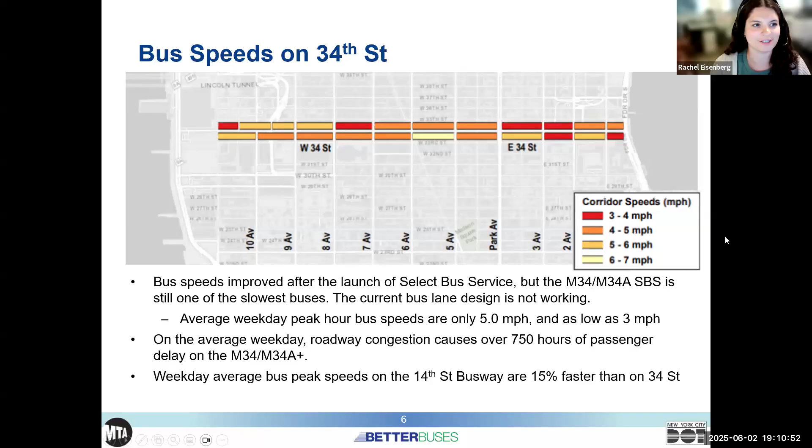Now just to go over a summary of our work to date: curbside bus lanes were first added to 34th Street in 2008. As Joe mentioned, select bus service launched in 2011 with the M34 and M34A SBS routes. As part of that work, we upgraded many of the existing curbside bus lanes to offset lanes seen today and added 11 bus bulbs, with one still underway at 8th Avenue.

More recently this fall, we conducted pedestrian intercept surveys and merchant surveys along 34th Street between 2nd Avenue and 9th Avenue. Over 200 pedestrians were surveyed, and DOT visited 112 businesses along the corridor. Earlier this winter, we presented existing conditions to community boards 4, 5, and 6, and in this meeting we will be presenting a draft proposal.

So just going over a little bit of what we've heard from all of that work. From our on-street engagement, we heard about overcrowding on sidewalks, long crossing distances, concerns about congestion. Bus riders noted slow bus speeds and long wait times, and businesses noted an overall need for additional loading space on and around the corridor.

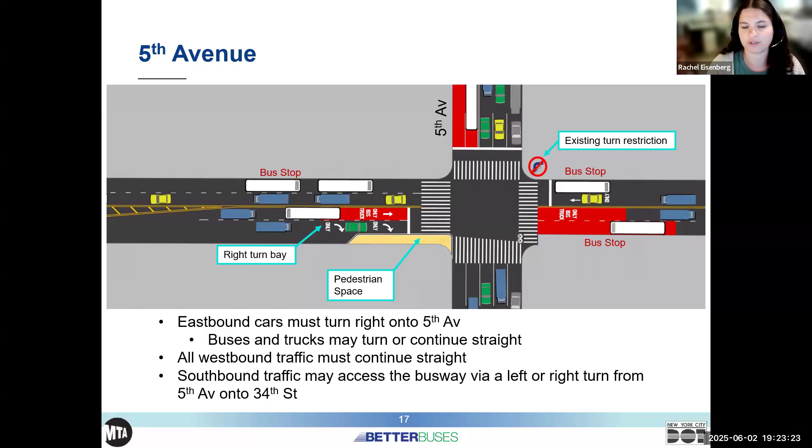At 7th Avenue, similarly, because of existing turn restrictions, vehicles will continue straight. We are proposing some expanded pedestrian space in the southeast corner of the intersection.

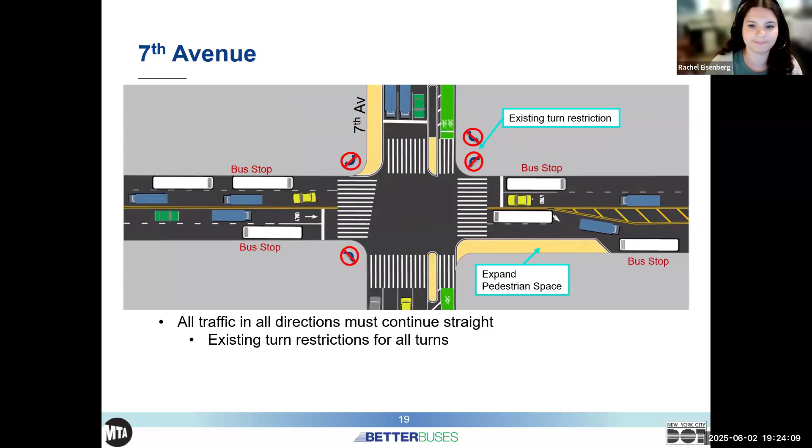At 8th Avenue, we're proposing a right turn bay in the westbound direction. Only buses and trucks can continue straight in the westbound direction. In the eastbound direction, because of the existing turn restriction, the existing left turn ban, all vehicles will continue straight through the intersection as they currently do.

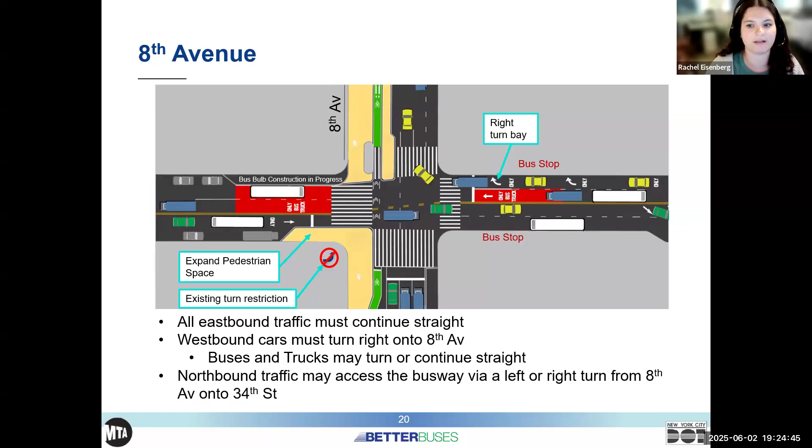Again, at 8th Avenue, similar to some of the previous intersections, northbound traffic can access the busway via a left or right turn from 8th Avenue onto 34th Street.

And finally, 9th Avenue is our eastbound gateway on the western end of our corridor. You'll notice, very similar to 3rd Avenue, all traffic in the eastbound direction is required to make the right turn via a new right turn bay with some daylighting.

In the westbound direction, because of the existing left turn ban, all vehicles will continue straight as they currently do. Traffic can access the busway via a left turn from 9th Avenue onto 34th Street.

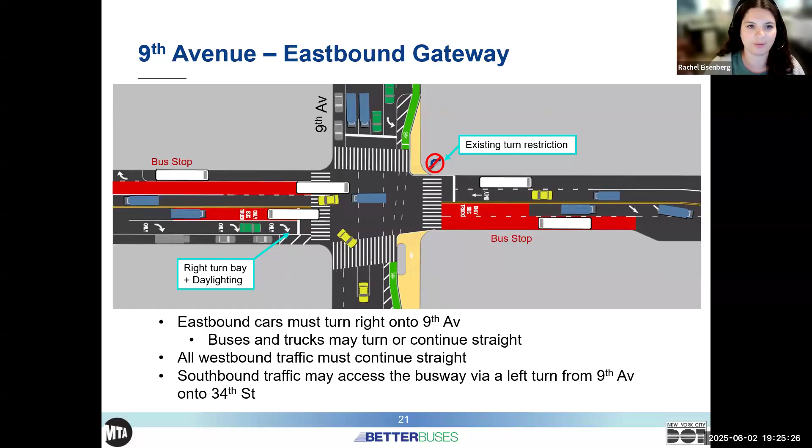We're also adding some painted pedestrian spaces to shorten the crossings at our existing mid-block crossings between 9th and 8th Avenue, 8th and 7th Avenue, and 7th and 6th Avenue. These are existing mid-block crossings, so we're just hoping to upgrade those crosswalks to shorten the crossing distances.

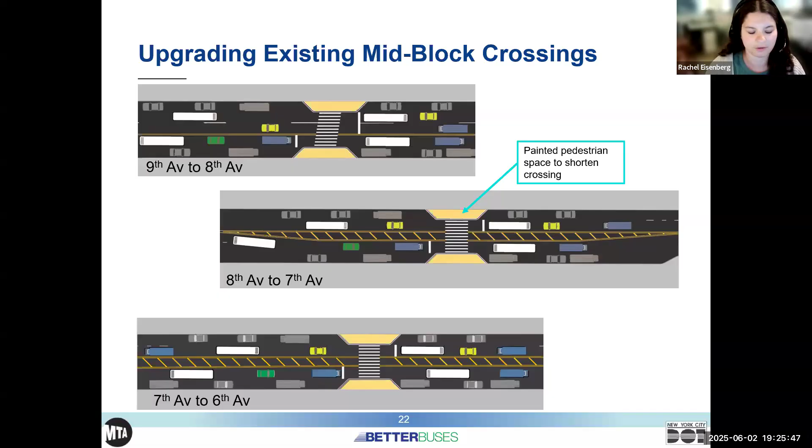So just talking a little bit about enforcement. We currently have the ACE, which are the MTA's on-bus cameras and fixed location cameras on 34th Street.

Once we implement a busway, those new regulations will be updated with the camera enforcement. The cameras will issue warnings for the first 60 days, and then they'll be enforced as usual. Of course, we work in close coordination with NYPD for any of our launches, but particularly for our busway launches.

Now I'm going to talk a little bit about traffic analysis. We know that this is a very important corridor, central to the commercial heart of New York. It's bounded on either side by significant tunnel crossings with the Lincoln Tunnel and the Queens Midtown Tunnel, and we know that this makes 34th Street a very unique condition.

Although it's great for us to have 14th Street as an example to look upon and a case study we can use as inspiration, we know 34th Street is very unique. So we know traffic analysis is very important to our understanding of what a busway will mean, not only for 34th Street, but the surrounding roadway.

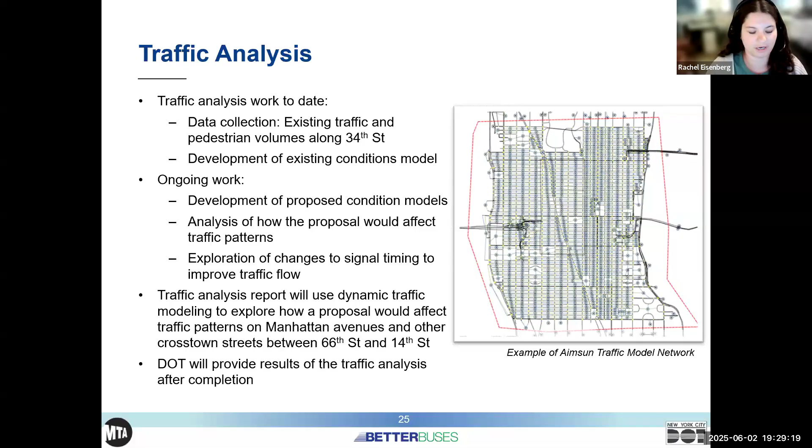Although our traffic analysis is still underway, we're able to do some origin destination analysis to understand where drivers are going who use 34th Street. We've used data based on vehicle and app GPS data - for example, if you were using Google Maps, that kind of data.

From that, we found that for vehicles traveling along 34th Street, only 1% have a destination on the corridor - so their stopping point is on the corridor. 28% of the vehicles traveling on 34th Street are traveling in the areas directly north or south of 34th Street. Again, this is just looking at 34th Street between 3rd and 9th Avenue.

We've also found that 24% of the vehicles traveling on 34th Street had destinations in other parts of Manhattan - further north, further south, to the far east or far west. And we found that 47% of vehicles traveling on 34th Street had destinations outside of Manhattan, whether that be an outer borough or a different state or county.

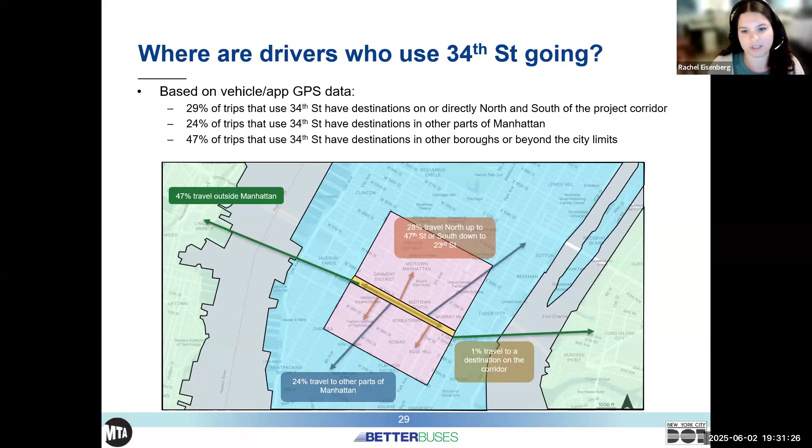Let me just go back for a second. This really gives us an idea of how people are using the corridor. It shows us that a significant portion of people using 34th Street are trying to get to something beyond just Manhattan - whether that be tunnel or bridge crossings, or maybe just further north and further south on the island itself.

So moving on to our summary and next steps. Our goals for 34th Street are to make bus service faster and more reliable, increase safety, and ensure access to businesses. Our proposal is a 14th Street style busway between 3rd Avenue and 9th Avenue.

And again, this is a draft proposal. As we continue to work on this project, we're working to finalize our traffic analysis, further develop our design, and synthesize community feedback.

Our next steps this spring are to meet with community boards to discuss the draft proposal. You all are our last stop for community boards 4, 5, and 6, which this proposal touches. We're hoping your feedback will help shape our final proposal. We're of course continuing site visits, visiting the corridor to understand how people are using it and how we can improve it.

Continuing this summer, we will keep working on our traffic analysis and refining our proposal based on that and feedback. Later this summer, we hope to share a refined plan, with the goal of implementation in late summer or fall of this year.

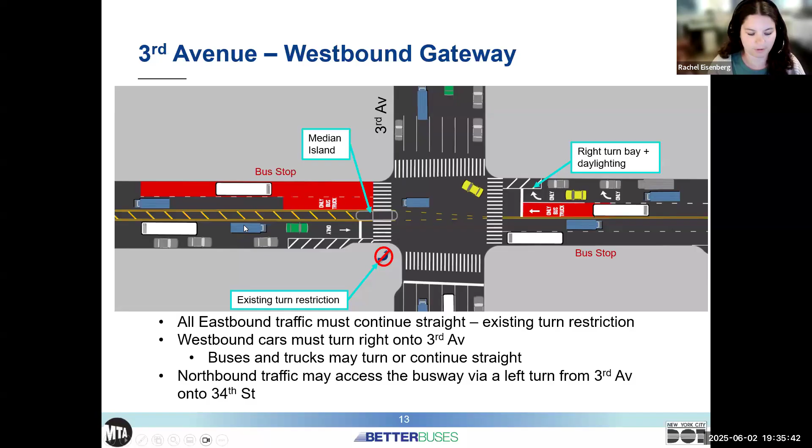Michael, do you have another question? That was it, that's it. Okay, great, thank you very much.

Anna, go ahead. Would you mind explaining—I imagine there will be questions around the east-west boundaries—is it relating to the river crossings? Yep, no problem, let me pull up. So yes, our proposal is between 3rd and 9th Avenue, and there are a number of reasons why we are looking at these extents for our busway.

Of course, there is the highest ridership around the central portion of 34th Street, where we have the majority of subway and tunnel connections. It's also much more of a dense commercial corridor, a little less residential. Between 3rd and 9th Avenue we have a lot more ground floor commercial, which is useful—we've generally done our busways in heavily commercial corridors. We also, very importantly, have the Queens Midtown Tunnel exit street right here between 2nd Avenue and 3rd Avenue on the east side where you are, and on the west side we have Dyer Avenue, which connects 34th Street with the Lincoln Tunnel.

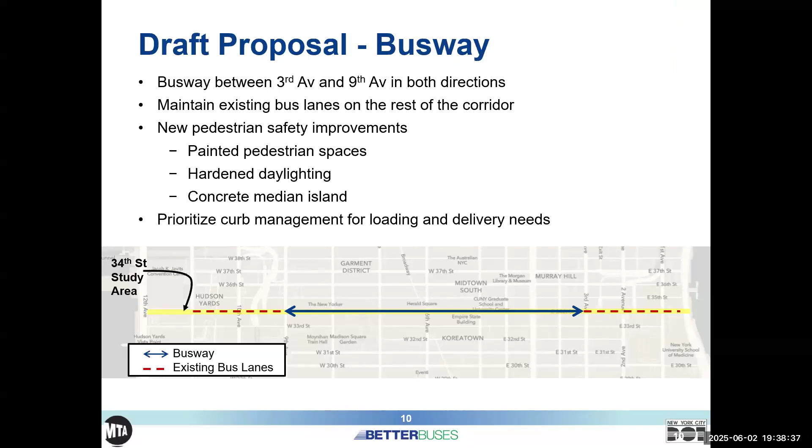Thank you. Let's go to Larry. Thank you. I notice at Lexington Avenue, if you can pull that up, at the northwest corner the bus stop is missing. That must have been an oversight. We're not proposing any changes to the location of bus stops as part of this proposal, I should note.

Well, then it's missing now, and it really needs to be added back. Because in the spirit of saving safe steps, especially for seniors going up and down Murray Hill, which is steep, it's really advantageous. So many seniors ride the bus on Lexington Avenue and want to transfer at 34th Street, and having to walk half an avenue block to get to a bus stop never made sense on any of these SBS routes. I hope you'll revisit this in the future on 14th Street and 5th Avenue too. But here, you definitely need to put the bus stop at Lexington Avenue and 34th Street, northwest corner, and be consistent with what I'm seeing elsewhere.

Well, just real quick, I could say the stop isn't at Lexington because the transfer to the 6 train is at Park Ave. No, that's a totally separate issue, and it's quite a distance. We're talking about people who want to transfer from bus to bus without having to hike a quarter of a mile. It's the same, we're trying to save pedestrians and bus riders time. We're not trying to save bus drivers time, I hope. Well, but at the same time, we try to keep the buses moving as quickly as possible.

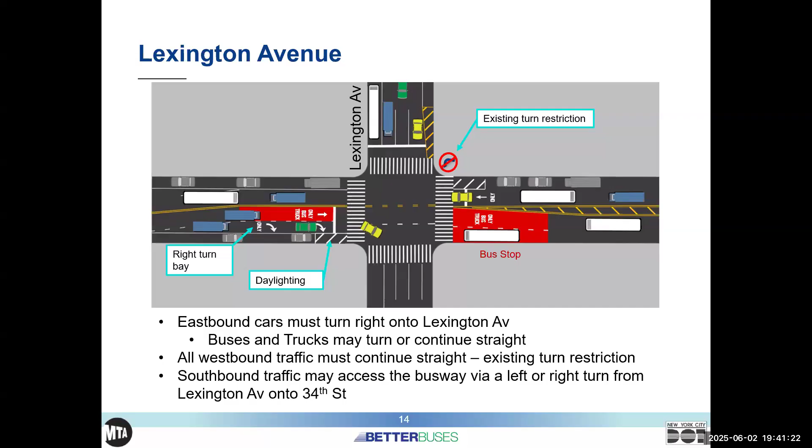And there was one other thing I wanted to bring to your attention. Is this a question or a comment on the proposal? It's a comment and a recommendation, a little bit beyond the scope of the bus lanes, but I'll save it until we come back to discussing. All I'm saying is you have mounted camera gantries. You should put one east of the entrance to the Queens Midtown Tunnel, between First and Second Avenue. Okay, thank you, Larry. Bronco.

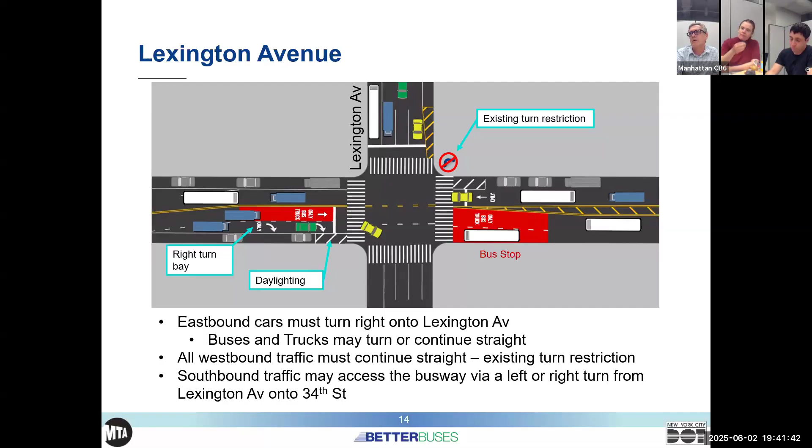Hey, thank you. Quick question. It's not just M34 and M34A, it's all the express buses coming in from Queens, one after the other. Do you have a sense, maybe this was in your presentation and I missed it, how many people are on these buses on 34th Street? That's question one. Oh, that's 28,000 just for those. Oh, the express altogether. Yeah, so that includes the express buses. Okay, thank you, about 28,000 people.

And what are you going to use to harden the daylighting there? Because sometimes if the daylighting isn't hardened, it becomes illegal parking. Yes, thank you so much for that question. For hardening the daylighting, we'll be looking at things like vertical delineators, potentially granite blocks or planters, possibly Qwick Kurb, which is a product that also has a vertical element, so it prevents anyone from parking in the space. We know that especially on a corridor like this, where parking and loading space is at a premium, we want to keep the spaces we've designated for daylighting clear. So whatever we use will have a vertical element, whether it's a delineator, a granite block, or a planter.

Thank you. I've got a question. We received a fair amount of feedback from the community with concerns that private vehicles use 34th Street for traveling between the two tunnels. I appreciate the slide where you mentioned the ongoing traffic study. I'm not sure if you have answers for that today, given the study is still pending, but could you talk at all to the existing volume or the expected impacts from vehicles making those trips today?

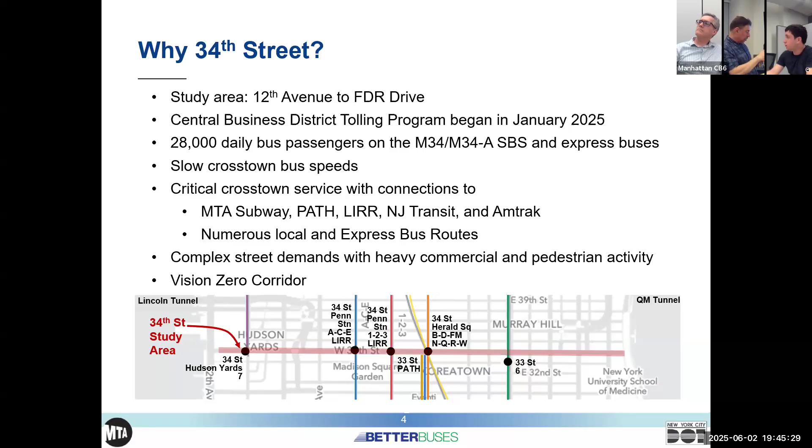Do we have any other questions from the committee? You'll have a chance also to ask further questions later.

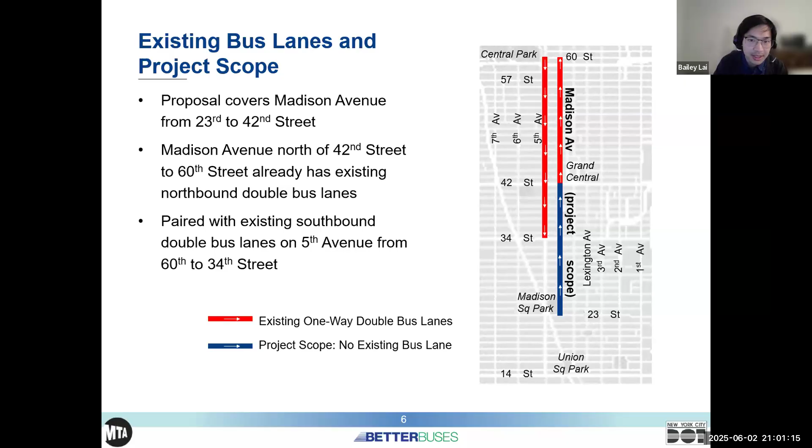And with that being said, I also want to re-highlight that there are existing bus lanes north of 42nd and Grand Central through to 60th Street. There's also a southbound existing bus lane on 5th Avenue, which works in tandem with Madison Avenue, again from Central Park and 60th Street all the way down to 34th Street.

And these are just images to show you the existing conditions of the double bus lanes at their respective corridors on 5th Avenue and Madison Avenue.

Based on the existing double bus lane evaluation data that we have from the MTA, back in 2018 5th Avenue double bus lanes were implemented, so we have much more recent data compared to the Madison Avenue existing bus lanes. That data from the period between 2017 and 2019 shows that before-and-after speeds on local routes increased 6 to 12%, and speeds on express bus routes increased 11 to 20% — quite substantial bus speed improvements from the more recent implementation of the 5th Avenue bus lanes.

So with that being said, I'll pass the mic over to Jamie to talk about bus routes and bus speeds particular to our portion of Madison Avenue.

Thank you, Bailey. Hi, my name is Jamie Cho, and I'm a bus service planner with MTA New York City Transit. As Bailey mentioned earlier, 34 bus routes travel within the Madison Avenue study area, with 5 local routes and 29 express routes. Most of these express routes travel via the entire segment, with the local routes beginning travel on Madison Avenue at either 25th Street or 32nd Street. On an average weekday, over 1,000 buses travel within the study area, with 8,000 daily aggregated boardings and alights at the bus stops there.

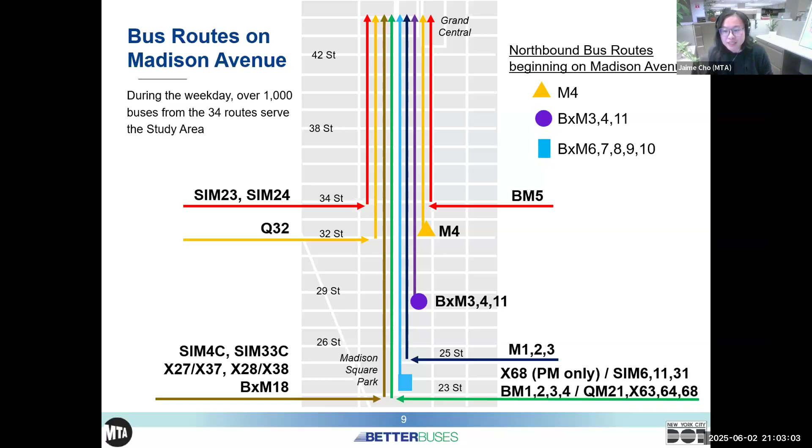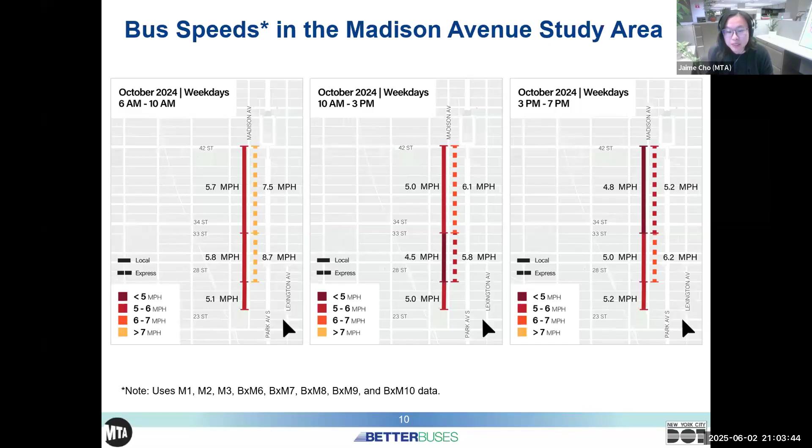As part of our study in collaboration with MTA, here at DOT, we also collected general traffic volumes and speeds, as well as did a preliminary traffic analysis of the entire extent of the corridor.